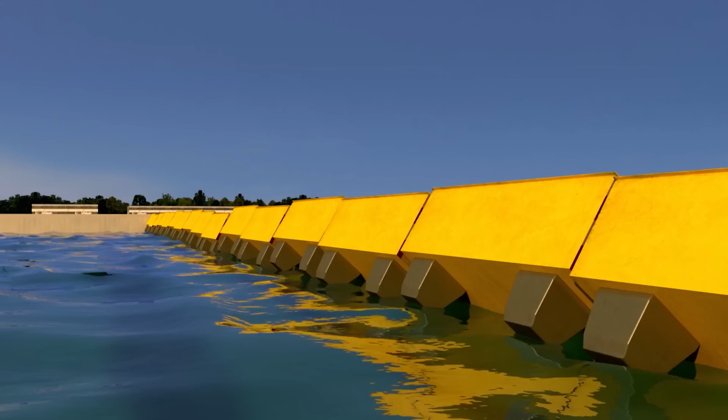For the last 30 years, engineers have planned one of the most ambitious moving dike projects in the world, dogged by indecision and scandal. Today, the Mose, the mobile seawalls the city never needed in the past, are almost ready to be used.

A new day rises over the Venice lagoon.

The water in the lagoon is between just 4 and 14 meters deep. But when the 550 square kilometers of sea surface are whipped up by adverse winds and tides, the sea level can rise by up to 2 meters, flooding the city that was built on millions of wooden stakes that hold the hundreds of sandbanks and islands together.

The architectural treasure that is Venice is threatened by the very element that made it prosper in the past: water. Its position and wealth have been its ultimate downfall. With a dwindling population, the city is literally being broken down by tourism and climate change. But saving Venice has become a World Heritage priority, and billions are being spent to stop the rot.

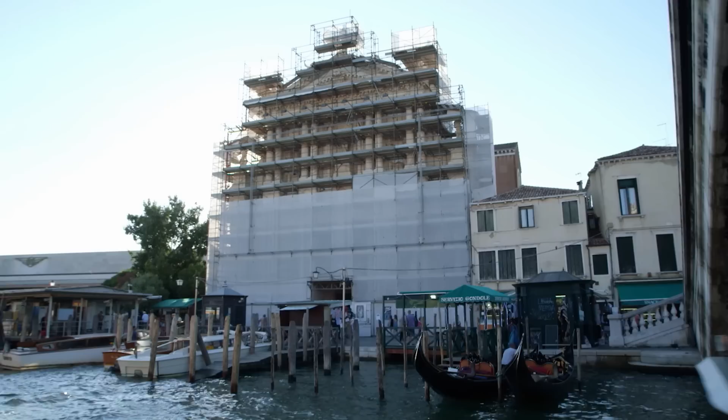The lagoon is an ecosystem in danger. Not only the city, but the hundreds of islands and wetlands that make up this unique landscape risk being lost forever, with the added complication of rising sea levels.

Bounded in the north by the river Sile and in the south by the Brenta, for centuries the Venetians fought a battle to stop the lagoon silting up, even deviating the course of inland rivers. Access to the sea was Venice's source of power, and the lagoon was its natural defense. In the last 30 years, the situation has been reversed. Trade now goes to Marghera, the city that drained the water table, and the sea has become a threat.

The walls of Venice are the massive floating barriers that will stop the sea from flooding Venice.

Giovanni Zarotti is the lead engineer on the Mose project. He has seen it grow over the years and now heads up the team that will bring it to fruition.

The new Venice consortium of Venetian enterprises has come together to build the Mose, or Modulo Sperimentale Elettromeccanico, the floating walls that will defend Venice from high waters.

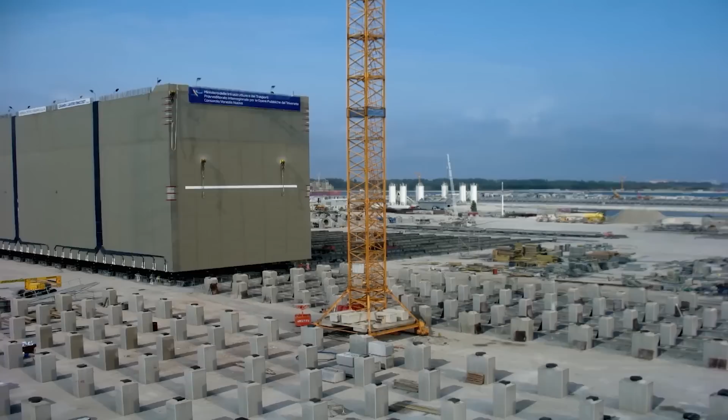Moving the massive engineering parts that make up the Mose fell to one of the world's leading heavy lift companies, Fagioli. In 2012, the company was engaged by the new Venice consortium to lay the floating barriers and concrete housings that cross the Lido entrance to the lagoon. It was the beginning of the final phase of the Mose project.

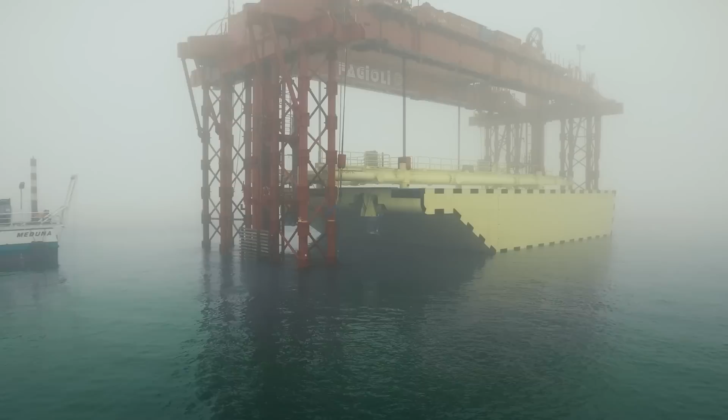However, the Malamocco and Chioggia entrances required extra engineering, as they are even deeper and wider than the Lido entrance. Fagioli's engineer, Tommaso Favaretto, was the lead engineer on the project.

As compared to the previous operation, we added horizontal elements, crosshead beams. We lengthened them to allow us to cover the geometric parameters of the walls of Chioggia and Malamocco. They weigh more and are larger than the Lido Tre Porti walls. Here we're talking about 400 to 450 tons of weight to move over a length of several tens of meters.

The Mose is one of the largest works of civil engineering built in Italy. Over the last 10 years, it has provided hope that the city can be saved from sinking under the waves.

The world waits with bated breath to see if the walls of Venice will actually save the city. The project is one of the most complex works of civil engineering ever built in Italy, designed to save the city from periodic flooding.

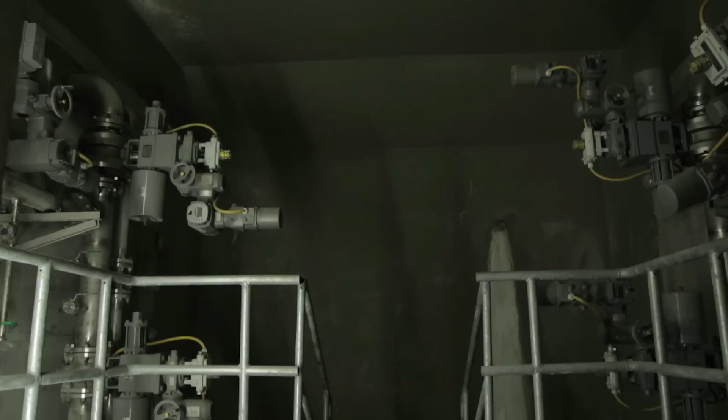The project was officially launched in 2003, and a lot of the work, most of which has already been finished, were works of civil engineering. So, for example, the concrete housings that form the base of the work, and the housing for the walls, consolidation work, and the essential infrastructures that the whole project needs, located at the lagoon entrances.

The Venice Lagoon is 80% made up of wetlands that are partially submerged, and only 12% is made up of islands, while the city of Venice is actually held together by millions of wooden piles pushed into the mud and sand.

The tides that so threaten the city are also its only real drainage system. Twice a day, clean water enters the canals and dirty water is taken away.

As a result, there were several prerequisites for the Mose that the designers undertook to respect, not only to maintain the overall visual aspect of the lagoon, but also to ensure free exchange of water between it and the open sea.

So we began the planning process, but the Italian government set a certain number of prerequisites for the construction process, and there are two main ones: that the construction should have a low visual impact and should not greatly modify the overall aspect of the lagoon. The second was that it should not substantially change the hydrodynamic exchange between the open sea and the lagoon.

Later, the plan involved restoring the natural ecosystem that contributed in the past to slowing down the flooding process.

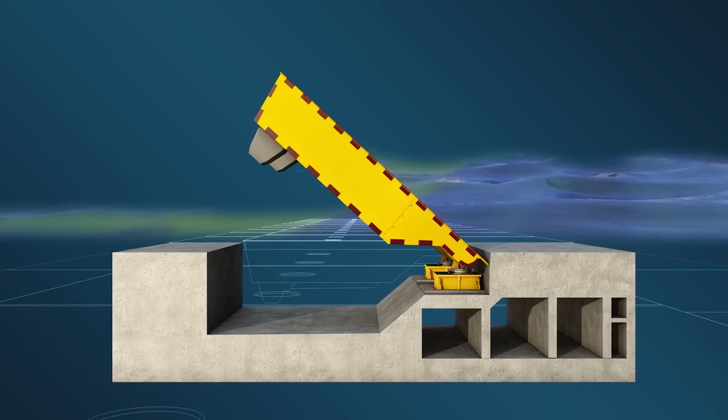The Mose concept is based on a system of floating barriers to close these 3 openings when adverse wind and sea conditions are forecast. They are massive steel walls that can be filled with compressed air when necessary, rising to the surface to make a floating wall.

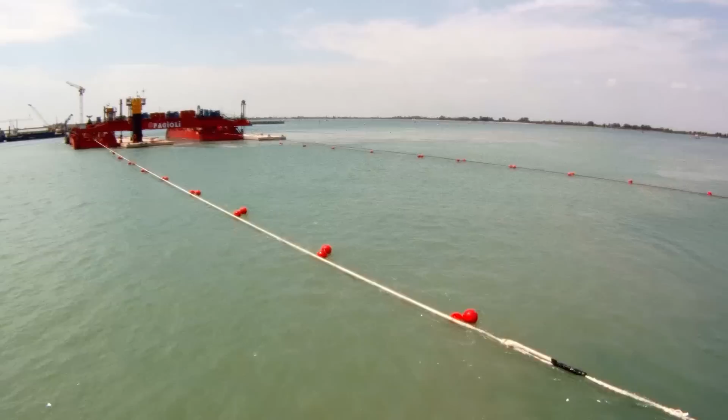Fagioli used a special catamaran to position each 12,000-ton concrete housing over the 12-metre deep trench dug into the sea floor, where 4 300-ton capacity strand jacks lowered it onto bags that were slowly emptied to provide the soft landing needed for absolute precision.

The exact location of each caisson was guaranteed using GPS positioning and radar. It was one of the most complex moves Fagioli had ever carried out.

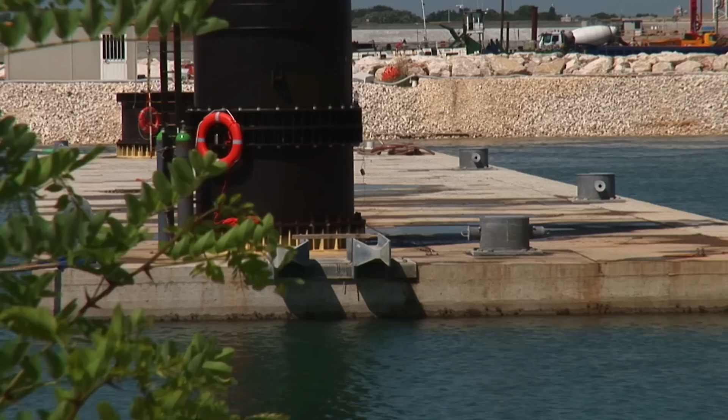The channel is particularly deep, and the caissons, or bunkers, were built close by as they were particularly heavy. While at Lido each caisson is able to house 2 barriers, here each concrete underwater bunker houses 3.

At Malamocco, the system used was different, although the housings were essentially the same. They were built on a bank above sea level and then moved via a system of rollers and taken to the synchrolift, a kind of massive elevator that lowered them into the sea. They were then floated away and tugged to their final destination, and sunk again.

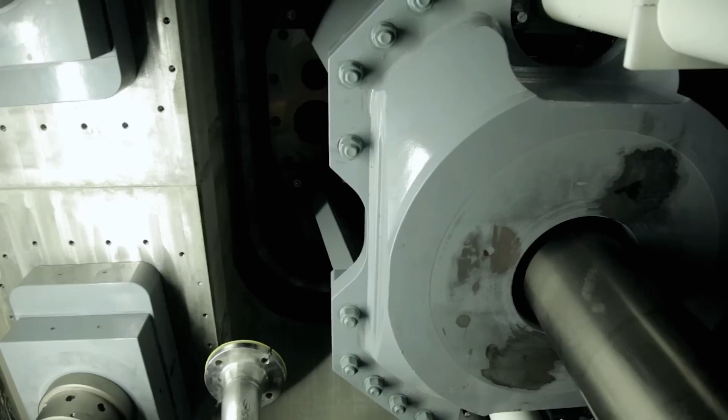Then they were lowered into the water to be tugged out to the open sea and dragged to the place where they were to be sunk. The sea floor had to be specially prepared to house them, so that their roofs were flush with the natural depth of the sea in those locations. Then they had to be emptied to allow access to workers to prepare the electrical wiring and compressed air pipes that activate the enormous floating walls.

The size of the housings varies from one lagoon entry to another, but the largest are 60 meters long, 40 meters wide, and 12 meters high, and the whole of the height has been encased level with the seafloor. Weights differ too, but we are in the area of 22,000 tons of concrete.

The barriers have a very important element, that is, the hinge that allows them to rotate and also receive all the surface piping that carries air, that make them rotate and float. So there are corridors that allow workers to run through the housings.

The depth of the lagoon entrances at Chioggia and Malamocco required significant modifications to the original gantry crane that was used in 2013.

The Malamocco entrance has an extra difficulty that was dealt with during the planning phase and in the construction phase: we had to guarantee the continued passage of cargo ships going to Porto Marghera, the industrial area of Venice.

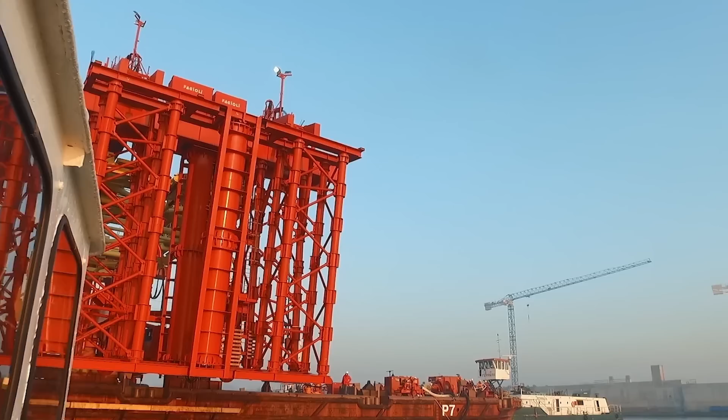The Fagioli engineers, however, had other concerns. Their new gantry crane had to be tall enough to reach the deeper caissons of the Malamocco and Chioggia openings, some 14 meters deep, and at the same time be small enough to be safe and stable on the barge.

The openings of Chioggia and Malamocco are deeper. Malamocco, which is the deepest, is 14 meters deep, between the surface and the top of the housings.

It was necessary to raise the crane's height. So we needed to make the crane taller, adding several meters of leg length. Compared with the previous 9 meters, we had to add 6 more meters of trellis tower.

An engineering complication made their lives even more difficult.

This gantry crane was built especially to lay the 37 walls that make up the barriers at Malamocco and Chioggia. The massive trellis structure had to be able to lift the larger floating barriers that weighed more than 400 tons and were wider than the Lido barriers. The calculation of the forces applied to the different parts of the crane had to be precise, especially because the crane had one potentially weak point.

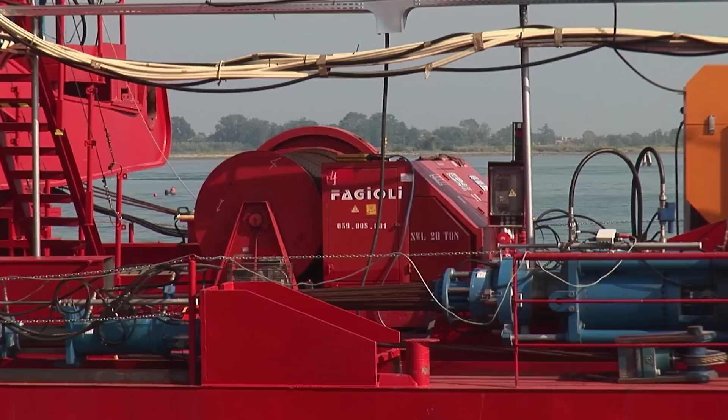The special tool that the Fagioli engineers have at their disposal is the strand jack, the hydraulic jack that is able to slowly lift hundreds of tons of weight, using a concept that is simple in itself but highly complex to build.

A strand jack is a hollow hydraulic cylinder with a set of steel cables, the strands, passing through the open center, each one passing through 2 clamps, one mounted to either end of the cylinder. The jack operates in the manner of a caterpillar's walk, climbing or descending along the strands by releasing the clamp at one end, expanding the cylinder, clamping there, releasing the trailing end, contracting and clamping the trailing end before starting over again. The real significance of this device lies in the facility for precision control.

When many strand jacks are activated at the same time under the control of a central computer system, the lifting power of each individual steel strand can be multiplied infinitely. Fagioli famously supplied the near 100 strand jacks that rolled the Costa Concordia onto the artificial sea floor so that it could be readied for refloat.

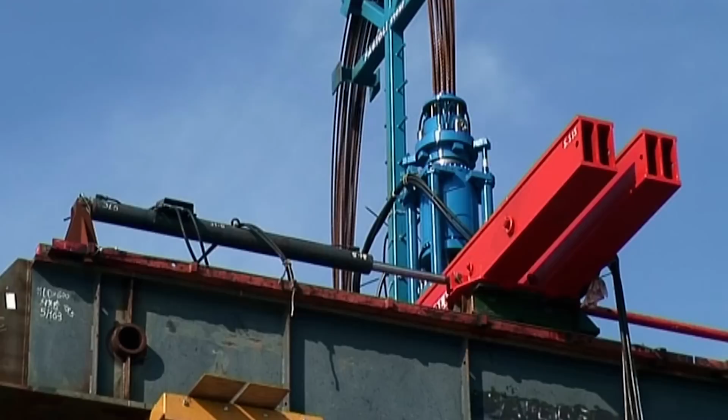Fagioli designs its own strand jacks, and on this entirely new gantry crane, the sets of strand jacks did different jobs. The folding legs needed 4 strand jacks each to open and close the joints.

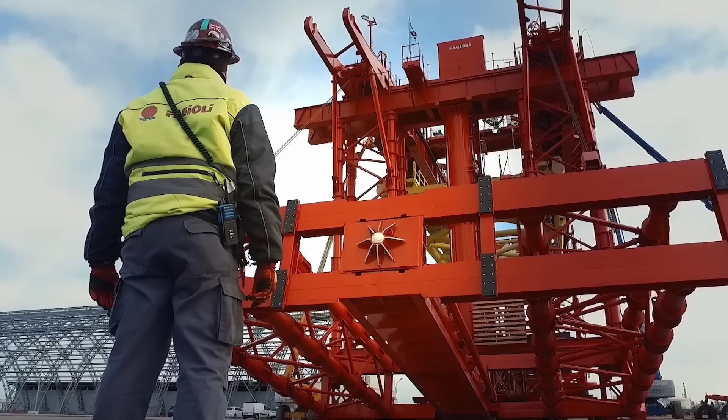The gantry crane is assembled and built at a site near the place of operation, but not on it. The place was ex Area Pagnan.

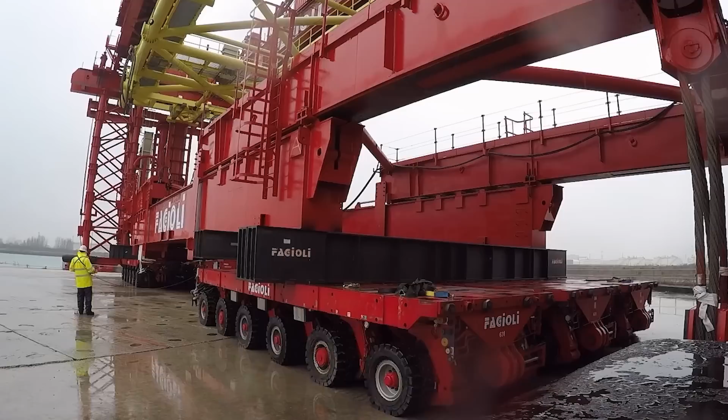Fagioli uses SPMTs in all their heavy lift operations. SPMTs are modular, wheeled flatbed vehicles that are remotely driven and maneuvered. They are able to move in any direction and even rotate, as each set of wheels is independent. They can be as long or as short as the user wants, as well as hydraulically raising their load.

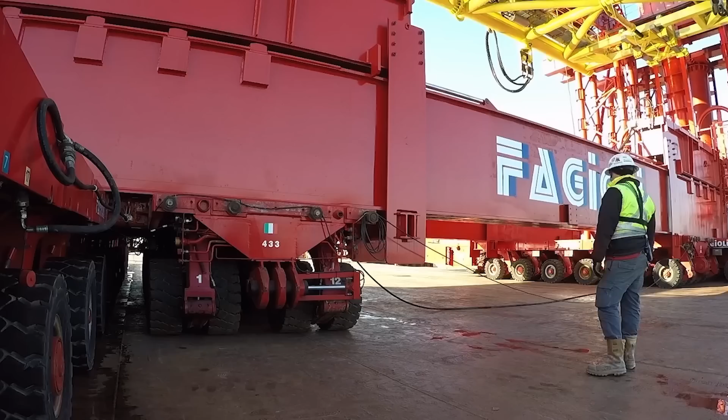Once the gantry crane was built and put together like so many Lego bricks, it was transported using another system built by Fagioli, called the transport beam. It was loaded onto the barge using self-propelled transports, and then taken to the worksite, where it was prepared for the installations.

Now came the delicate moment of actually taking the crane to the location of the massive concrete caisson.

Once the worksite was reached, the crane was disembarked and turned 90 degrees into the installation position. Then it was re-embarked in the installation position and taken to the point above the concrete housing where the first barrier was to be lowered and then set up.

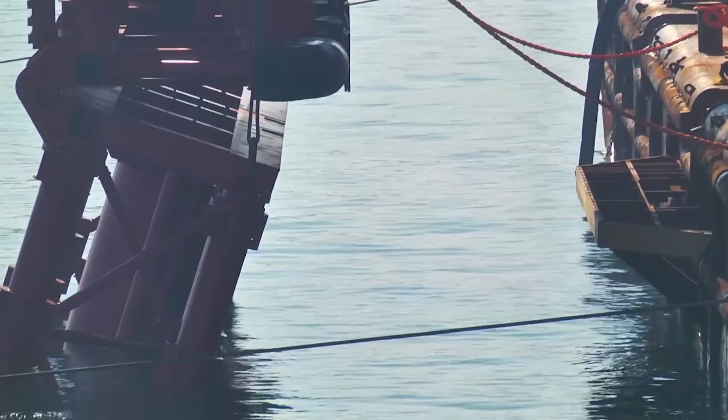The strand jacks pulled open the legs, which were then locked to provide maximum stability. The lifting device lowered the gantry crane onto the surface of the caisson.

The gantry crane was equipped with a centering cone located in the base of the frame, a male part that wedged into the receptacle on the surface of the concrete housing. Once in position, the gantry crane was lowered until the male cone on the foot of the crane entered the receiving cone located on the housing surface, entering the housing of the sill caisson.

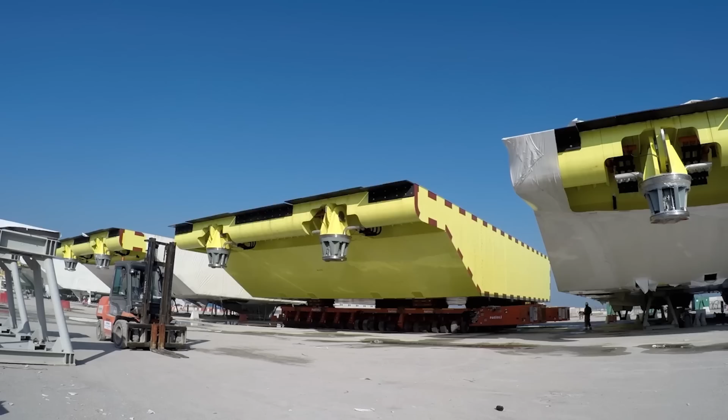The barge was withdrawn and went to collect the huge yellow floating barrier that had to be placed on the underwater hinge.

The fishing beam was lowered by four 300-ton capacity stranjacks, and once the barrier was safely attached using electrically operated couplings, it was raised. Once again the barge could slip away, leaving only air and water between the barrier and its place of final location.

The barrier is attached to the fishing beam, which is attached to the gantry crane via stranjacks that allow vertical movement.

The fishing beam is equipped with hydraulic systems that push against the gantry crane to allow for horizontal movement, so precise positioning is achieved both vertically and horizontally, almost to the millimeter.

Slowly but surely, the fishing beam lowered the floating barrier 14 meters underwater until the male part of the hinge fitted snugly into the female receptacle, where it could be fixed. The fishing beam could then be withdrawn once again.

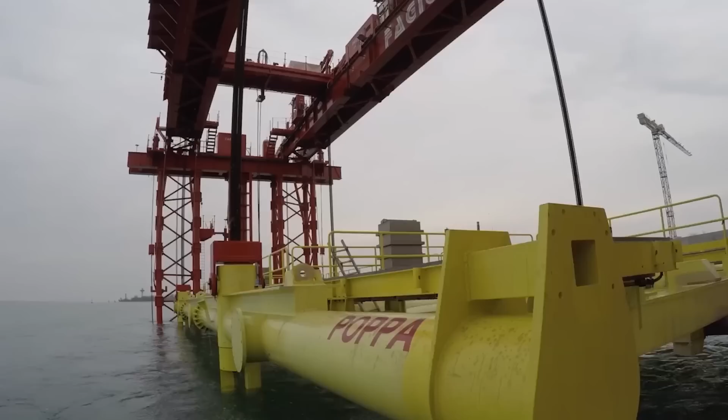However, the whole operation involved laying floating barriers in as little time as possible. So as soon as the first was fixed in place, the transportation beam was brought out on the barge, and once again the gantry crane was lifted out of the water. The stranjacks pulled up the legs, and once again the barge was tugged to the next position.

Laying the Mose floating barriers took months, in every kind of weather that the Venice lagoon could throw at the equipment and the men.

In all, there are 78 barriers, but more were actually built because there are 2 spare barriers for every lagoon entry. This is because these barriers will have a periodic need for maintenance, so in order not to leave the place where a barrier has been removed empty while it is being repaired, the extra identical barrier is positioned there as soon as the barrier due for maintenance is removed.

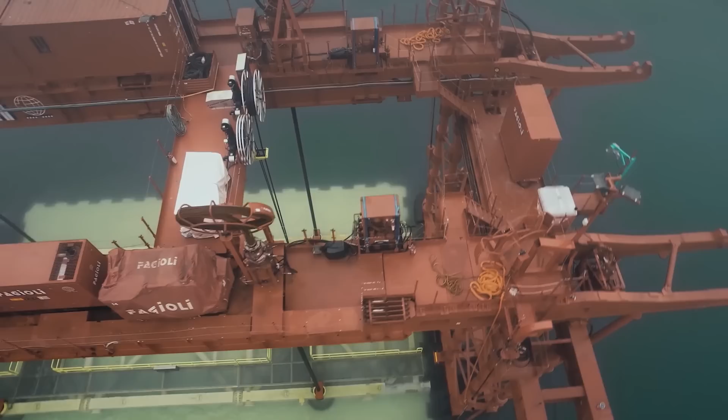As the seasons came and went, the floating barriers of Chioggia and Malamocco were securely laid, and the great civil engineering project approached completion. The next steps involved testing it.

The Mose floating barriers are already operating in experimental mode at Tre Porti, to check they work and in order to set activation parameters.

Here, all 20 barriers have been laid, and they have been raised several times, and so the entrance closed several times.

Although billions of euros have been spent on the MOSE project, it will only be activated under certain specific conditions—conditions that threaten the whole of the city, rather than just the area of Rialto and St. Mark's Square, the lowest points, which will continue to be flooded even during relatively low high tides.

The buildings of Venice are light, with as much as half of their outer walls open with windows. Rotting brickwork and wood severely undermine the structural integrity of the palaces and churches of this once thriving city.

Around 2020, we expect the whole project to be finished, with the support plant fully operational, and with MOSE available to protect Venice from high tides. By the end of 2021, we will have finished the ancillary work, more to do with the environment and architecture, that does not influence the operation of the whole project.

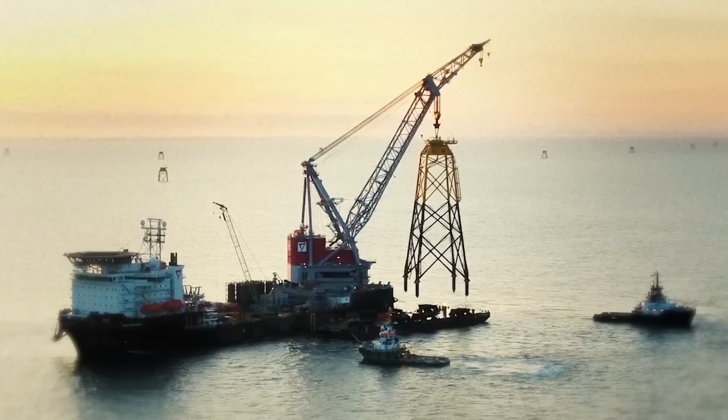The sun rises over the Dutch port of Schiedam, located on the busiest waterway of the country, west of Rotterdam and close to the open North Sea. This is where a hub of nautical companies provides the most advanced engineering support for the whole of the maritime industry. Gusto MSC is one of the oldest offshore design and engineering companies of the country, and it is where the world's largest and most advanced nautical cranes are built and integrated into ships that are also designed here. The glass and steel interior of the headquarters has been grafted onto a building that was once home to the company's competitor when it was founded a century and a half ago.

We see the ship and the jackup, but together with what we call the mission equipment, like cranes, we see that as an integrated design, which basically means the purpose of this type of ship is not so much sailing. The purpose of the ship is to perform a heavy lift. That's where it starts with. Is it for a ship, or is it for a jackup or a semi? That already has a big impact on the type of crane and on the design.

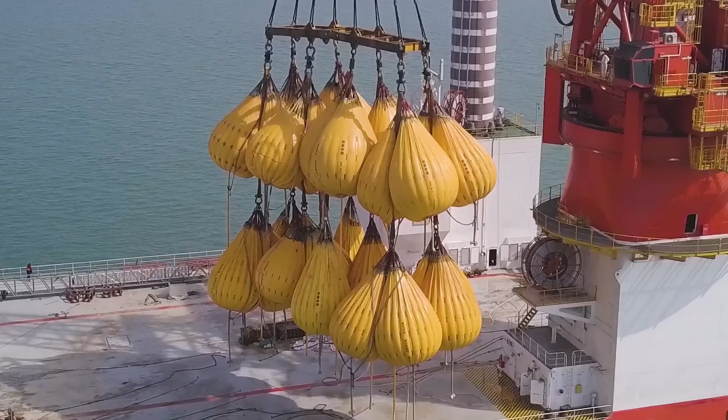The name of Gusto MSC is intimately tied to the world of shipborne cranes, machines that have played a fundamental role in the offshore energy industry for decades. Little-known machines that have been strategic for the growth of first oil and then the wind farm businesses. Gusto MSC's clients are companies that, amongst other things, require heavy lift capacity offshore. The cranes that the company has designed are integrated into ships, jackups, and rigs that not only navigate the seas but also have the necessary stability to withstand the environmental forces and perform their heavy lifting tasks.

Arjo van Putten is the chief engineer of the crane department at Gusto MSC. He has honed his skills designing massive cranes of all types, including the huge 5,000-ton crane of the Oleg Strashnov installation ship. Lifting capacity is one of the most important things, and the outreach, in fact the combination. For example, if it is 5,000 tons at 30 meters or 40 meters, that's really a big difference. Once we know that, then it is important also to know the lifting height, especially nowadays for the wind turbine installation cranes. The required lifting height increases quite a lot, so that's also an important factor, and it can have an impact on the complete design of what we are going to use.

Alain Wassink is the marine architect who designed the Oleg Strashnov and is now sales director for the Gusto MSC cranes. Gusto MSC is a design and engineering firm, and we specialize in design of mobile offshore units of all sorts and types, from jackups to semis to ships. The company started out as a shipyard already in 1862 and has made a lot of different things over time, but it has pretty quickly specialized in heavy-duty workships. Floating cranes already started in the 1900s, and dredgers and other ships. Especially from the 60s to the 70s, it started to specialize in the offshore industry.

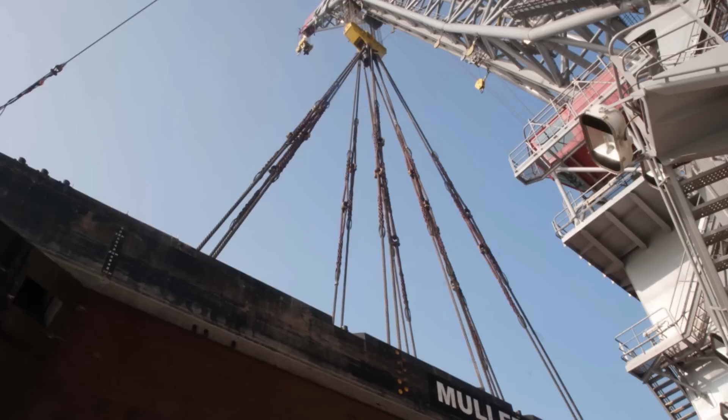The massive crane that Alain and Arjo have built is the result of 7 years of hard work, first designing and then building and testing the ship and crane. It was in the spring of 2007 that we got the order for the delivery of the crane.

Then we spent about a year on the whole design, and already we start purchasing materials because there are some long lead items, especially at that time when the market was booming, so delivery times increased quite fast. So we ordered all the long lead items as soon as possible. Then the eventual delivery was almost 4 years after we had the original order.

We started out already in 2005 with the owner, Seaway Heavy Lifting, to come up with a concept for a fast crane vessel. Most vessels were quite slow, 4 to 6 knots at that time. This would be a fast crane vessel, versatile, with the then highest lifting capacity for a monohull in the world. They wanted a design that could sail fast and be very stable when doing lifting operations, which usually is a contradiction.

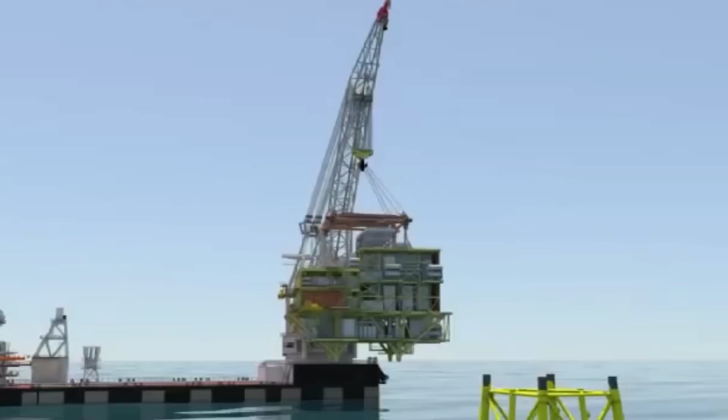The naval architects of Gusto MSC accepted the challenge to design a ship that was highly unconventional, but also highly competitive in terms of speed and, of course, fuel consumption. The design criteria for the Oleg Strashnov included the ability to work on site, while the ship also provided a stable base for the massive crane with its unique revolving main hook with a 5,000-ton lifting capacity. Designing such a ship, maintaining balance when the crane arm is fully extended, was a challenge.

We developed a very special hull shape with them, which is a patented hull that has a dual draft, where you can have a small draft, with a narrow hull, so less resistance, which is quicker with less fuel consumption, but less stable. And when you do a heavy lift, you need a lot of stability but no speed. So you can go to a deeper draft, and then the ship is much wider and has more stability.

The main characteristic is that it can lift 5,000 tons. It does it at an outreach of 32 meters. The maximum overturning moment is at another distance, that's 3,800 tons at 43 meters. The lifting height is approximately 100 meters above the main deck for the main hoist. And there's also an auxiliary hoist, which can lift about 30 meters higher, with an 800 tons capacity.

Oleg Strashnov, however, not only had to have one of the biggest cranes on the high seas, but also the widest range of lifting capacity. So Arjo introduced a unique design into the crane, a crane within a crane.

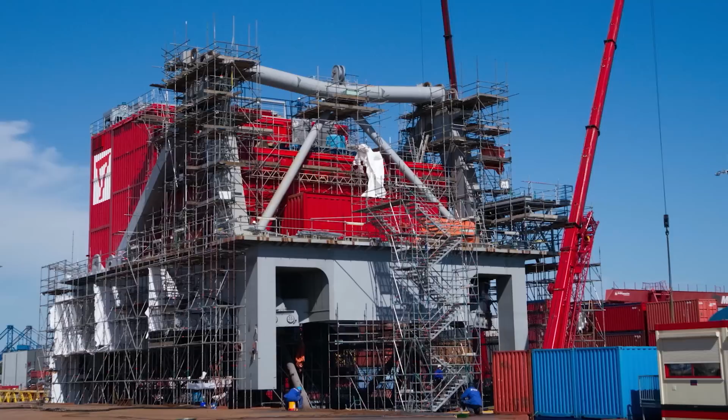Once the design phase was over, the ship and crane could be constructed. The day came when this monster had to be built, and Arjo and Alain worked together to deliver one of the most amazing and least celebrated ships plowing the ocean waves. In particular, the lifting part of the unit required some of the most innovative construction techniques. Everything is massive.

The boom chords, for example, the big tubes, are made from 690 material, that's steel with a strength of 690 megapascal. Other parts like in the A-frame, the backside, mostly parts in tension, are also made out of the 690 yield material. But the braces, which are welded, the tubes in between the big chords, are made of 355 yield material, because they are not governed by the stress in the material, but by vortex shedding.

However, most of the crane's work is done with small loads, and this is where the supplementary lifting machines come into play.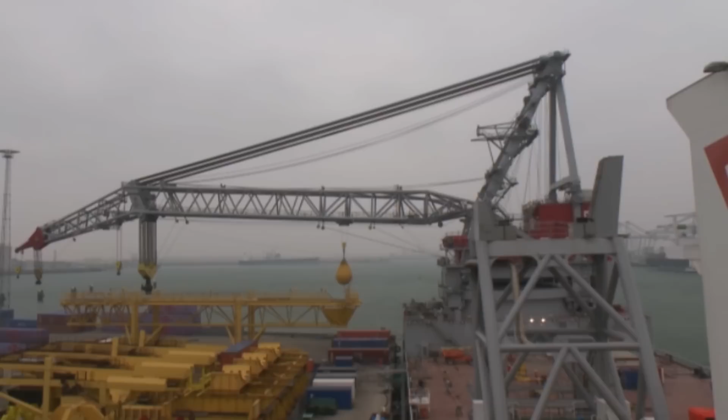A special thing about this crane is that, normally when the crane is rotating with an empty hook, with a boom at about 60 degrees angle, the center of gravity is exactly in the middle. That was one of the design criteria. There is a removable ballast system at the backside of the crane, and by doing this, most operations are actually small loads. So the lifting capacity is 5,000 tons, but I think more than 90% of the lifts are less than 100 tons. During all those operations, the boom is at approximately 60 degrees, and it can rotate without having to ballast, because the center of gravity is in the slewing center.

The industry sets standards, but these cranes are so huge that extra safety measures have to be introduced to make sure nothing, absolutely nothing, goes wrong.

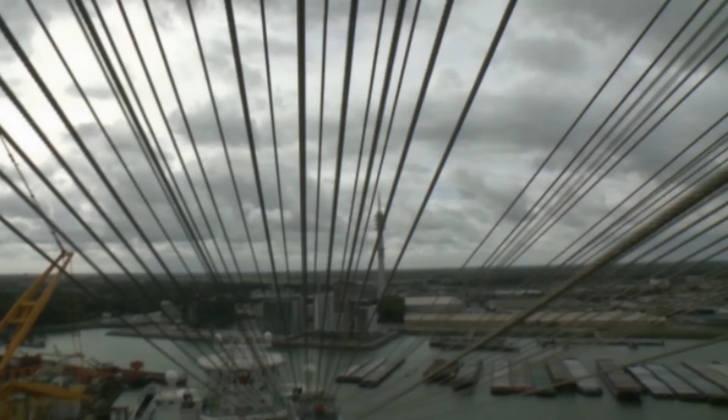There are several main component parts of a crane: the boom, the long arm that extends out to sea to lift heavy loads, and the A-frame that controls the extension of the boom, lifting and lowering it as necessary, and through which the lifting cables pass. There is also the ring platform around which the crane swivels, and the motor that provides the power both for moving the crane and turning the winches that pull the loads up or down.

On Oleg Strashnov, all these components are massive. The A-frame is also special, as the client required the ship to pass under the world's bridges, such as the Bosphorus Bridge that joins Europe with Asia, so as to engage in offshore heavy lift in the Black Sea, one of the world's most strategic areas for energy resources.

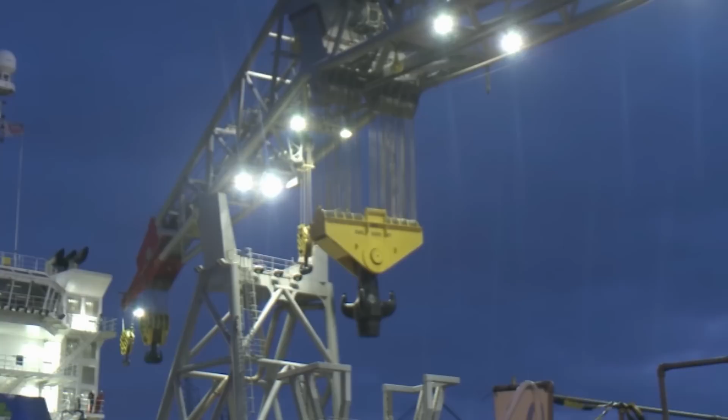We added an extra hinge at the aft side of the A-frame, at the back leg, which is a vertical leg. Normally that leg is in tension, but during transit of the vessel there can be a vertical load downwards as well, and then it's in compression.

What we did is we created an extra hinge, which is normally locked by a small beam. When we want to lower it, first the boom is lowered into the boom rest, and if we keep on rotating with the boom hoist winch, the rope tension is lowered, and eventually the A-frame should go backwards, but you have to help it a bit. So there is a locking system, and when you unlock it, there is a hydraulic cylinder that gives us what we say a kick in the knee, so it starts to bend, and then on its own weight, it has to go backward.

Once these major design features were established and construction completed, the actual assembly of the massive crane began. This in itself was a mega-lift operation.

The motor housing was built in China and delivered to the Schiedam docks, where it was to be integrated with the ship. Here it was lifted onto a massive barge and lifted by two shear legs to be transported to Oleg Strashnov.

The motor housing had to be positioned with millimetric precision, and only the expert eyes of the designers and construction workers could guide it properly into place. It was placed delicately on the base and the pin.

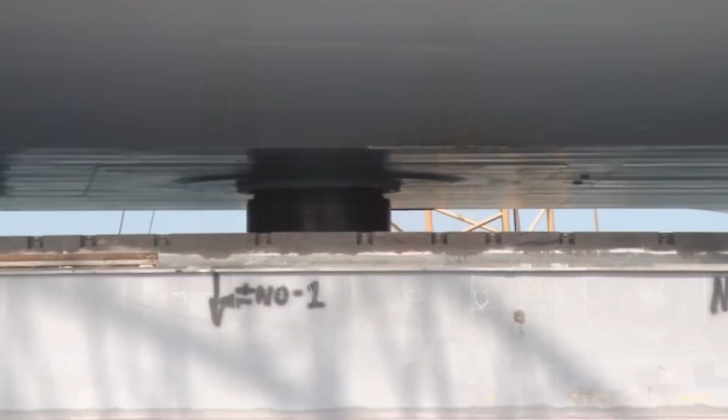The bogies followed and were fitted perfectly on the rails, allowing smooth rotation of the crane.

Then the A-frame had to be fitted. Not only the static part had to be precisely connected with the crane base, but the folding segment had to be lowered so that the massive pins that allowed it to be collapsed to reduce height could be inserted accurately. This in itself was a mammoth task, and yet there was much work still to be done.

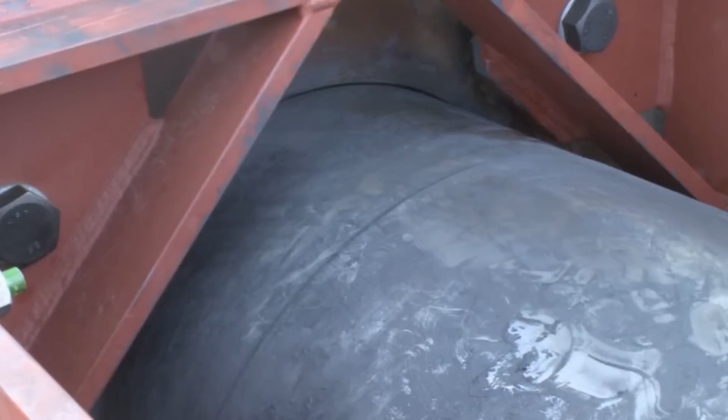The largest single element of the crane was now ready to be moved. The heavy lift company, Sarens of Rotterdam, moved the boom onto a barge using self-propelled modular transporters, or SPMTs, from which a massive shear leg was able to lift the 100-meter-long steel trellis structure onto the huge hinges that awaited it on the crane body. This was the crucial moment of the assembly of the whole Oleg Strashnov crane ship.

This was followed by lifting the ballast for the crane, the counterweights that are brought into play every time the boom lifts a weight at the fullest extension.

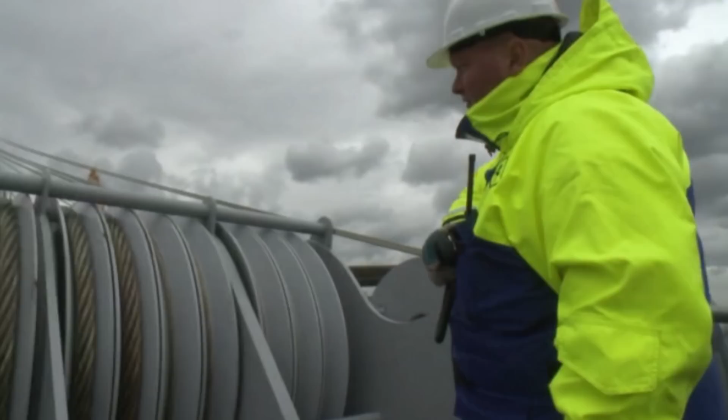The next stage involved the reeling of the cables and ropes. Dozens of steel cables were pulled through the boom guides and then meticulously wrapped around the winches. The closer to the core of the winch, the less cable is released, so the automatic gears are key to keeping lifting speed uniform. The 64-millimeter cables had to be guided by special ropes through the boom all the way to their winches, one by one, and wound on accurately, securely. This is the heart of the whole crane, where the lifting actually takes place.

From the client we receive certain lifting speeds. They specify a lifting speed and average speed, because if you have the winch, there are several layers of steel wire rope on the winch. The rope speed is different when you are at, let's say, the 10th layer or the first layer. So they specify an average speed, and that's what we work with. We calculate the required power.

Now that the crane had been constructed and installed on Oleg Strashnov, the next crucial stage could begin. Oleg Strashnov is the largest monohull crane ship in the world and flaunts three very special characteristics that other ships of the same type do not enjoy. It's fast, its crane can lift 5,000 tons, and it is incredibly versatile.

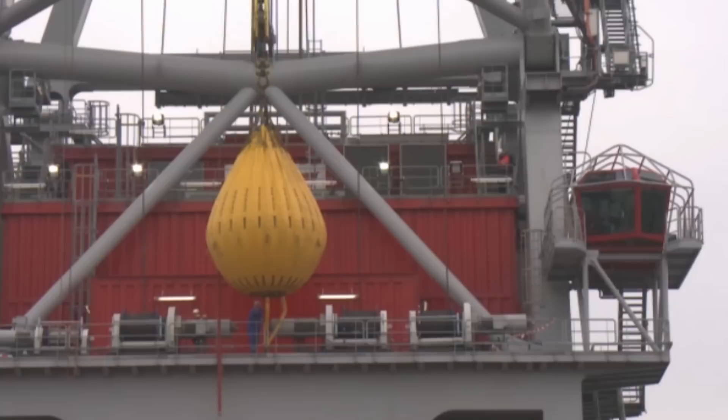The next test phase involved putting the secondary hook through its paces. Now came the moment for testing and calibrating the 5,000-ton crane. To do this, the crew filled a whole barge with water, and the main hook was lowered to lift it. Not only did it have to lift the weight of the barge and water, but, just for good measure, an extra 500 tons. The crane successfully lifted it and swiveled with it to put the structure to the test at all angles. The crane passed the test with flying colors.

The ship was now ready for sea testing.

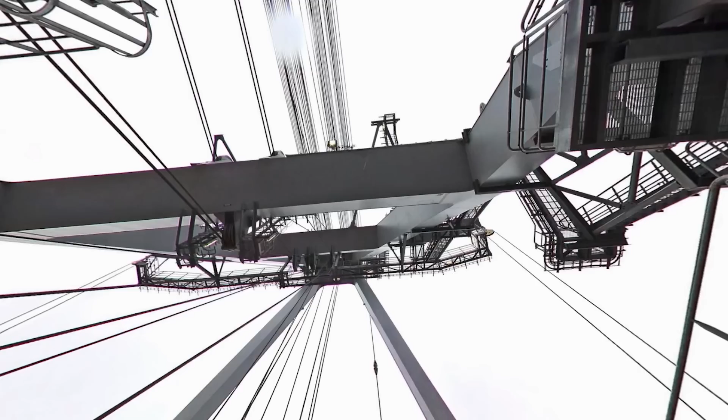So let's take a tour of the Oleg Strashnov as it is today. These photographs allow us to see the inner workings of the offshore workhorse. This is the view from the crane driver's seat. The whole length of the ship is now visible, with the hundreds of pieces of auxiliary equipment on it.

From the crane side, you have lifting tools, all kinds of tools that you use to actually pick up the load, rotate the load, control the load. For instance, for a wind turbine, once you put the monopile on the seabed, you need to keep it in place, otherwise it falls over, so there's a gripper that keeps it in place. Then you need a big hammer that is actually lifted on, and that's also a couple hundred tons, the hammer alone. That is all the equipment for the lifting operation itself.

Then for the positioning, you need the ROVs, so the remote-controlled robots underwater. Surface diving is still used. It's amazing how much equipment fills up the deck when you do such an operation.

The main hook was specially forged as a single block just for this crane.

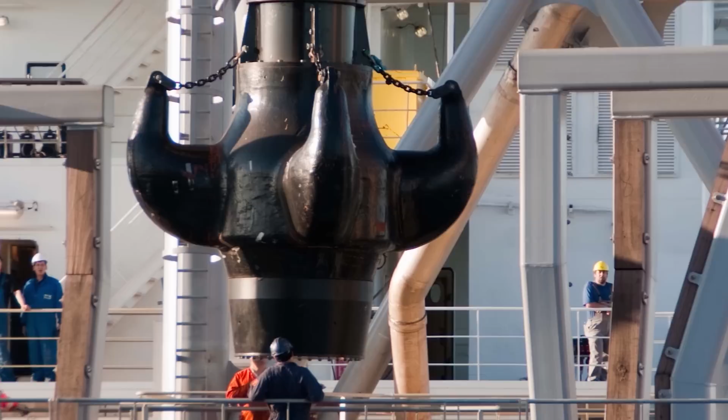The crane is electric powered, so it receives power from the vessel. The vessel has generators, and we receive 6.6 kilovolts from the vessel. It's about 6,500 kilowatts, the power that we maximum consume. In the crane, at the backside, there are 3 levels of electrical equipment, and there it is transformed to 690 volts. We have rectifiers that make DC from the AC, and then we have drives who convert that power to the motors at a certain frequency and speed.

Special safety features ensure that accidents with the winches are practically impossible, including clamps on the cables and sensors that stop the hooks from impacting the top of the crane. The crane is also designed to be able to operate in harsher weather conditions than its competitors.

Then the hook is hoisted towards the boom. We always know the exact height of the hook, and when it's coming close to the boom, there is a warning. When it comes a bit higher, it automatically stops and there is an alarm. And when there is the warning, it already goes to a lower speed. When there is a situation where the crane operator wants to go even higher than that, he can overrule that, and there is another safety switch at the boom which stops that motion, and that cannot be overruled anymore.

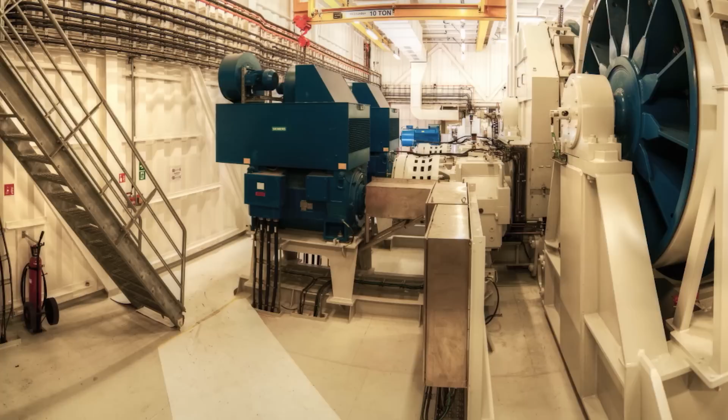The boom and hook are not the only areas of the ship that can go wrong. There is a double braking system on the cables and winches too, that can hold loads in place if there is a danger, or even lower them slowly if power is lost.

These winches have a double brake system. You have a system on the drum itself, that's for a holding brake and for emergency. And there is also a brake at the gearbox. So there is the motor that transfers the load to a gearbox, and that's the high speed. Then one of the intermediate shafts is used to mount the brake.

There was a bit of a special request in this case, because we also needed to do emergency lowering on those brakes. So in case there is no power available, we need to be able to lower the load with the brakes.

Oleg Strashnov has a class 3 dynamic positioning system, which means it can stay in location with movable thrusters, but it can stay in location even after a fire in one of the engine rooms. So it's got redundant engine rooms, redundant thruster rooms. A total installed power of 27 megawatts is needed, divided over 6 generators, with a 6.6 kilovolt high voltage distribution system, which is top end for this type of vessel.

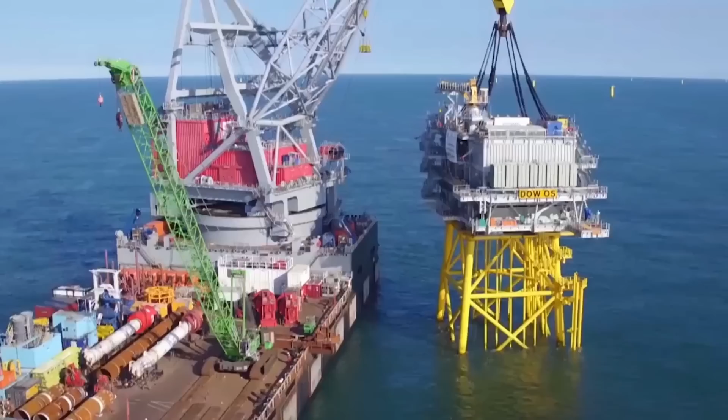The same is true for crane movement, as every change in the ship's center of gravity has to be compensated for. When we do have a big load, indeed the vessel needs to ballast. So there is a ballasting system, and it pumps a lot of water from one side to the other side.

For example, when we do a test load with 5,500 tons, to make one revolution, we do it very, very slowly, because the crane can do it in 3 minutes, but the vessel needs to pump a lot of water to the other side all the time. So one revolution takes then about 1 hour instead of 3 minutes.

The ballast system on the crane vessel is one of the key systems you have on board, because you have to keep the ship upright and compensate for the crane. So the crane is revolving and the ballast system has to compensate for all the loads that act on the hull, and it's a ship, so it moves.

In this case, with this kind of crane, with a large outreach, you need a lot of ballast capacity. So the ship has around 50,000 cubic meters of ballast capacity, and it has a pumping capacity of 20,000 cubic meters per hour.

The true power of the crane lies in the motors that power the winches. They are 6,000 kilowatt engines, and have redundant backup systems just in case they fail and a heavy load has to be brought down gently.

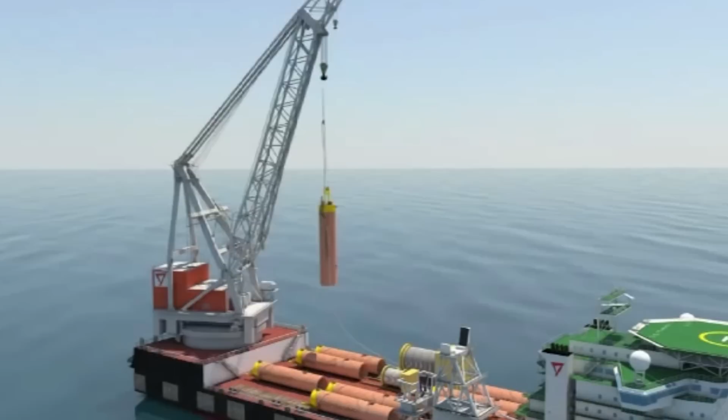At last, Oleg Strashnov was ready for operations. Its extreme versatility allows the ship to perform all the operations involved in building an oil rig or a wind farm. This animation shows the phases of laying the foundations of a wind farm control center: first lifting the foundations and positioning them on the sea floor, and then moving the structure itself, using the 2 hooks on the crane to right the steel structure and position it onto the foundations.

The really heavy lift comes with the upper platform, a monoblock of drilling and living areas, all less than 5,000 tons. The ship's versatility allows for it to carry out many operations, and this in turn reduces time on site, generating significant savings for oil companies and wind farm builders.

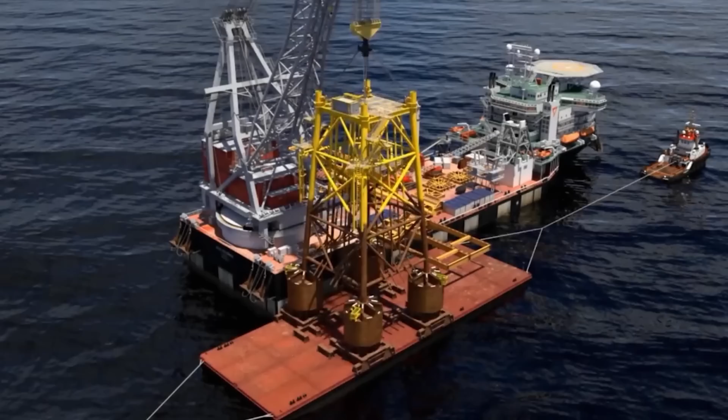The whole new source of energy is developing all around the world, and this ship has the ability to supply the wind turbine market optimally.

Offshore wind farms maximize efficiency and can be bigger than those built on land. The size of the individual wind turbines that must be installed on the seabed is also growing.

It was designed to do operations for the oil and gas business. But the first job it had after it was finished was the installation of monopiles for quite a big wind farm, and they were very successful at that, at Seaway Heavy Lifting. Afterwards, the majority of all the work they have done with the vessel is for installation of foundations for wind turbines. They also did some interesting oil and gas jobs, but the market changed quite a lot in that period.

In these images, we see the phases of wind turbine construction and how the massive 5,000-ton crane is suited to the task. The ship is able to lay both the foundation and the mast, and then the turbine itself, all in sequence.

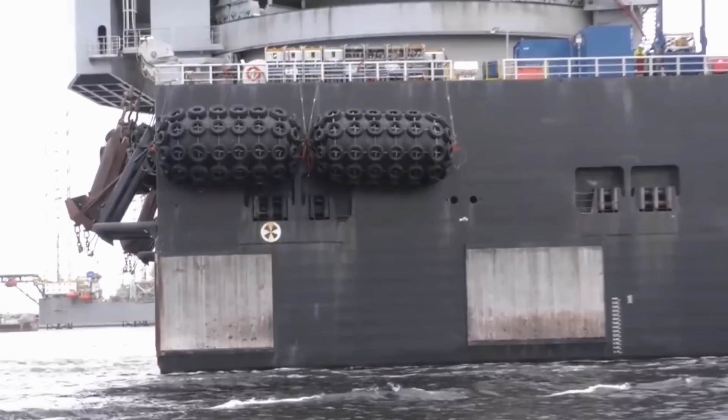The Oleg Strashnov sails off onto another assignment as the offices of Gusto MSC and the port of Schiedam are closed for the night. There is no shortage of work for these new versatile crane ships. The future for seaborne heavy lift has never looked brighter.

Another day at the port of Schiedam, Netherlands, the heartland of the nautical industry, a hub for nautical services worldwide. This is where Gusto MSC enables and supports safe and efficient operations at sea.

The Oleg Strashnov crane ship has inspired other vessels, including the Hai Yang Shi You 201, which was built in China based on Gusto MSC design, and also mounts a 4,000 metric ton capacity crane and a pipe laying system able to lay rigid pipelines in 2,000 meters of water.

In the energy business, mono-hull ships are not the only solution, however. So the company has designed several jack-up rigs that are more stable than ships when working at sea.

There's a clear difference in foundation installation and turbine installation, where especially the foundations are getting bigger and heavier, but they can be installed by ships, which are usually easier built with larger cranes, while a jack-up is more stable, less movement especially, and is very well suited for turbine installation because of the fragile parts.

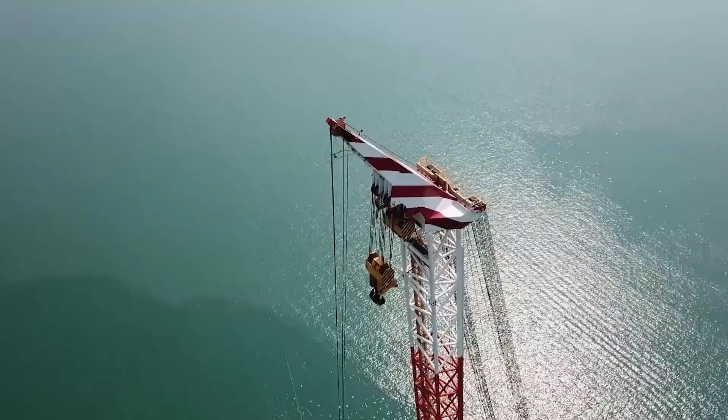One of the jewels in the crown of Gusto MSC is this mini crane built to be mounted on the leg of the rig to provide especially fine lift.

Named after a crab's claw for its crab-like grabbing motion, the Chela can reach below the cantilever and elevate toward the main deck, providing crane access to areas that were traditionally blocked by the drilling cantilever. By being able to work in this area, Chela has significantly reduced total well construction time.

And in the energy sector, time is money. This crane, with its multifunctional claw arm, is also special because it can easily be taken apart and remounted and retrofitted for different jobs.

But it also is making repair work on platforms out at sea safer for workers by literally lending a hand in narrow, small spaces. By separating wireline operations from the drill floor operations, Chela effectively reduces human interaction between the different crews doing different jobs.

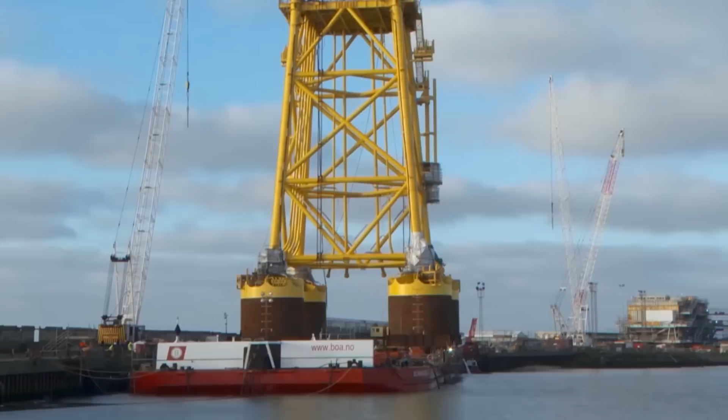The wind blows constantly across the dunes of the Netherlands' northwest coastline. Just offshore, wind turbines are being laid to create some of the largest offshore wind farms in the world. The Dutch are world leaders in this sector, and Oleg Strashnov is poised to capitalize on this rapidly expanding new market. As demand for energy continues to surge, oil exploration will continue in the petroleum-rich North Sea, and dependence on renewable wind energy is also likely to expand, creating many new opportunities for these kinds of versatile marine cranes.

The sun sets on the port of Schiedam, the heart of heavy lift in the Netherlands. This is where ships have been built for centuries. This is where cargo has been handled by traders in the great Dutch tradition for centuries. Nowhere is more suited to the development and construction of some of the world's most clever cranes.

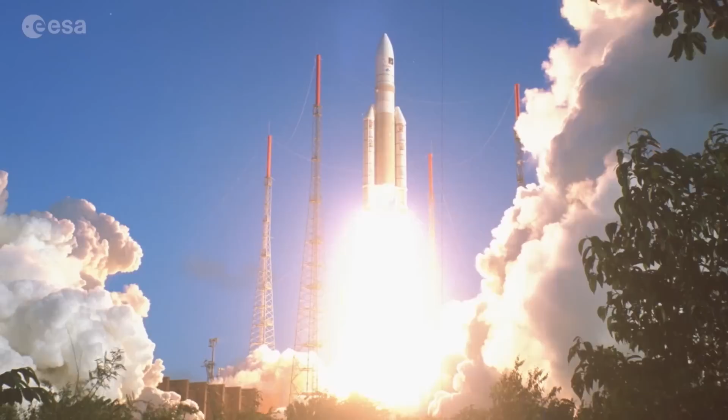This is the largest rocket in regular operation today. The Ariane 5 represents the evolution of a family of launchers that started when Europe's space industry was in its infancy.

This massive launch vehicle is built all over Europe, but assembled here in the cathedral at the Ariane Group construction site at Les Mureaux.

It is a robust design that has resulted in 85 completed launch missions in the last quarter of a century. But in the next 2 years, it is due to be replaced by the more versatile and competitive Ariane 6.

Six, 5, 4, 3, 2, 1, top. Allumage Vulcain, allumage des 2 EAP et décollage VA244.

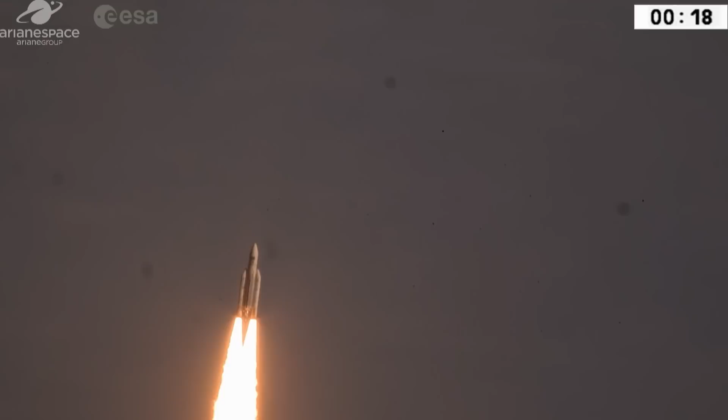The Ariane 5 launcher shoots into space, its rockets not only pushing its own weight in metal and fuel, but also a high-tech payload. The launch is the culmination of decades of development, experimentation and research in engineering and ballistics.

That's why rockets are dangerous, because by nature they are very explosive. The reaction principle, found by Newton in 1687, is that you expel something behind you fast, and the faster you expel it and the heavier what you expel is, the more reaction you get.

The most exciting moment, and the reason we have this profession, is the first time you launch a new launcher, or the first time you launch a launcher on which you've had a key role in the design, or for my case, in rebuilding the flight software of a launcher.

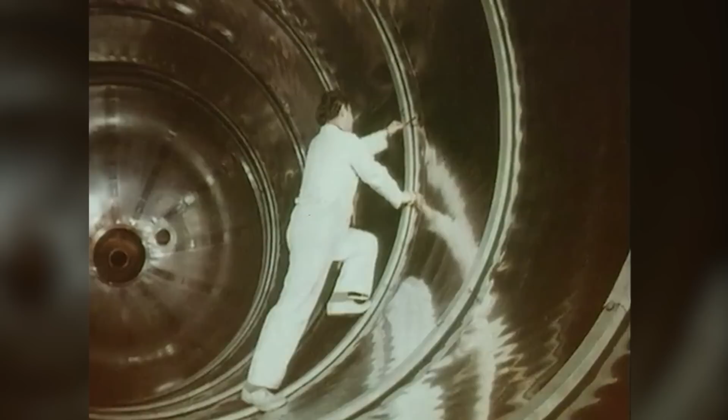The Ariane rockets were developed in France, but draw on almost a century of experimentation and research worldwide. Europe's rocket scientists began with simple, unreliable machines.

One of the founding fathers of modern rocketry, the Russian Konstantin Tsiolkovsky, discovered the propellant power of liquid hydrogen and oxygen.

In 1914, the American Robert Goddard proposed multi-staged rockets, solid fuels, and the use of the Laval nozzle, narrowing at the waist to accelerate the hot gases to supersonic speeds.

In Germany in the 1920s, Hermann Oberth studied rocketry and proposed that rockets could be used to explore interplanetary space. But when the Second World War broke out in 1939, all Germany's rocket science was put to building wonder weapons.

Wernher von Braun led the rocket program based on the Pomeranian shoreline at Peenemünde. It did not change the course of the war, but it opened a new chapter in space exploration when von Braun moved to the United States under Operation Paperclip, while other top German scientists were taken to Russia.

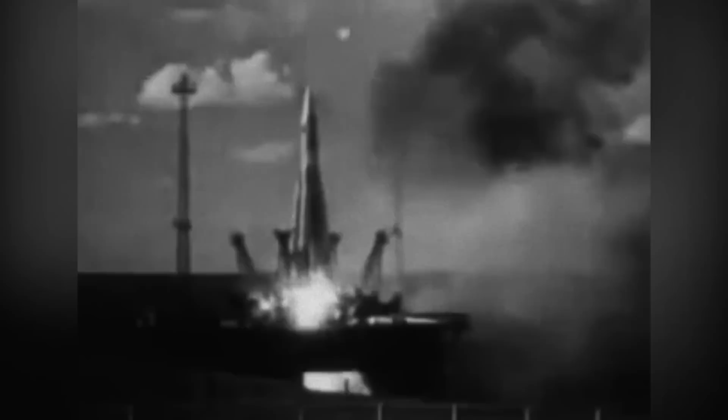Wherever they were made, rockets were at first powered by extremely volatile propellants. One of the world's foremost aerospace journalists is Bernard Chabbert from France.

In a rocket fuel, you have two components: the propellant and the oxidizer. The propellant can be kerosene, just like on the first stage of Apollo, for instance, and the oxidizer is something which helps it burn. Chemically, when you mix a very raw propellant with a violent oxidizer, the more violent it is, the more powerful it becomes.

Engineers have learned from the many mistakes of the last century to produce the reliable, fine-tuned rocket engines of today.

Mechanically speaking, it's a nightmare. You bring them into a combustion chamber where they have to be precisely mixed, more precisely than any cocktail in a bar. It's really pure chemistry.

You're working at the extreme of metal capabilities. You are going to really try to break something and stop just before it breaks. You have to gimbal the thrust, and this is done - it's just like cutting flowers. It's really something very precise, and it's almost a work of art in terms of guidance.

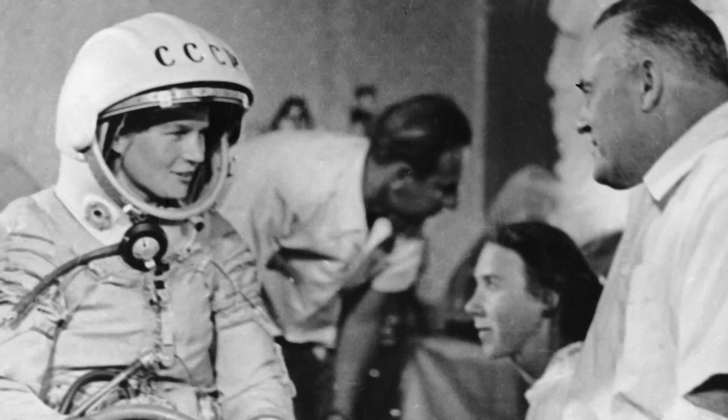Russia's own rocket genius, Sergei Korolev, began the Soviet Union's rocket program, developing first the Sputnik satellite, kicked into orbit by an R-7 rocket, and then the first manned spaceflight. By 1959, Russia had landed a vehicle on the moon, and sent a satellite around it.

Russia was winning the space race, and the United States had to respond. The Russians built a staggering number of R-7, Semyorka rockets.

It's tens of thousands, because they used it for military use as an ICBM, and they used it to launch Gagarin. They launched the Sputnik with it, they launched Laika with it, and today Europeans are launching Semyorkas from Kourou, because that rocket is so dependable, predictable and easy to use that it's still in use today, more than half a century later.

Outside the Soviet Union, only the United States had the ability to launch satellites. European nations came together to attempt to launch their own rocket, but it was a disaster.

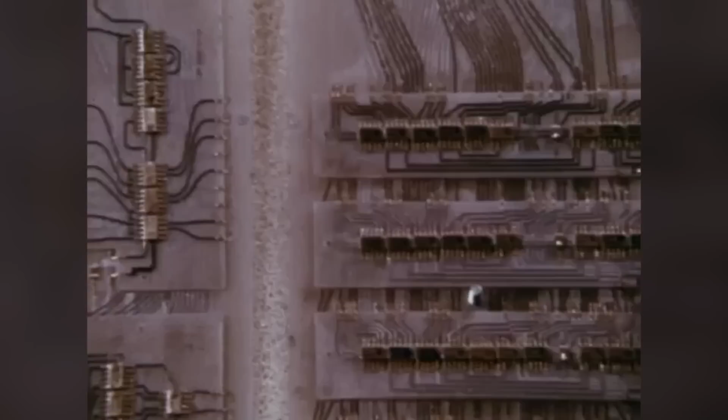The British came with the Blue Streak missile, a strategic missile. The French came with Véronique, a small rocket that evolved into technologically comparable rockets. Everybody brought its own component, they stacked them together, and called it Europa. They brought it to Australia, pushed the button, and it exploded into billions of little pieces.

The French space agency, CNES, Centre National d'Études Spatiales, is located in the heart of Paris, and Christophe Bonal is senior project manager. He has been involved with the Ariane project since the beginning. We developed a brand new satellite together with our German colleagues called Symphonie. This was in 1974, and we had no means to launch Symphonie. So we asked the Americans, could you please help us and launch our satellite? And they said, yes, okay, sure, no problem, you're welcome — with one condition only: please don't make any commerce from this afterward. Just keep it experimental, don't do any commercial activity out of it.

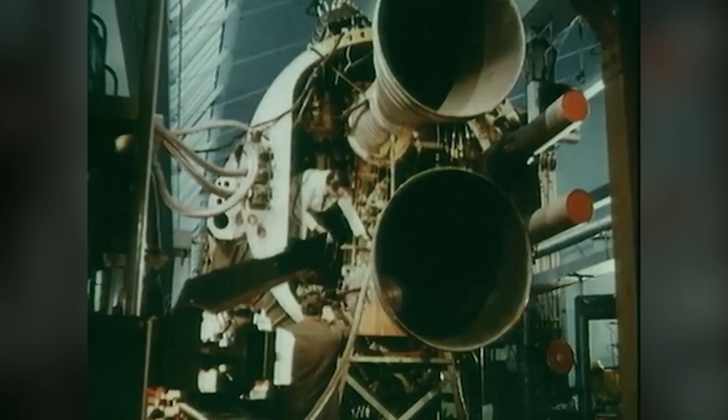And then we thought about it and said, no, whoa, no thank you, we'll do it on our own. So this was the decision for the development of a brand new family of launchers. The Americans, with their position regarding telecom satellites, created in Europe, and more specifically in France, a kind of reaction. Some of the French said we need to be independent in terms of launching capacity. We need to develop our own system, despite the fact that we've just missed the thing with the Europa experience. And that's how they got together.

At the same time, they developed the idea of ESA. The European Space Agency brought together the founding nations to develop an independent space capacity. However, Ariane 1 was still a long way away.

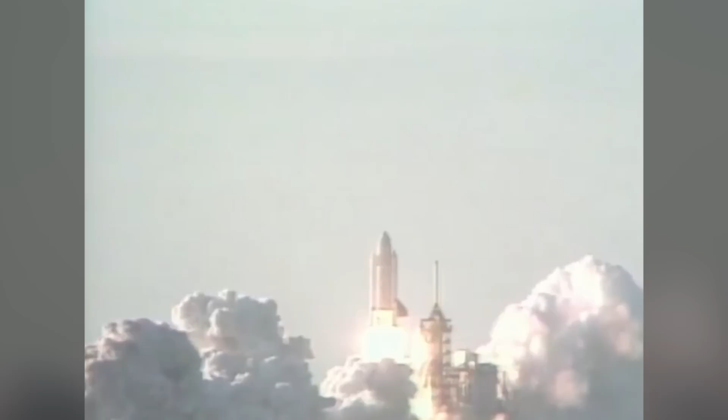In the 1970s, NASA developed the Space Shuttle, a reusable launch system designed to radically bring down the cost of launching satellites. It was an engineering masterpiece. There was this old idea of an aircraft going so fast and so high that it would get into orbit, and it became the shuttle. But I was there in Houston when they were launching the shuttle idea, and we had endless conferences about that, with people saying the shuttle would be a mix between the best of the rocket and the best of the aircraft. The end result was that the shuttle was a fabulous mix between the worst of the rocket and the worst of the aircraft.

When they built the space shuttle, in their opinion it was such a revolutionary machine that it should be able to fly every day, for negligible cost — so cheap, just to use and so on. So they came and told us, stop your Ariane, it's useless, just come and work with us on the space shuttle. And we said, sorry, but we like our autonomy. Okay, our launcher may be conventional, but we think it has some future. It paved the way for the huge success of Ariane that we still have today.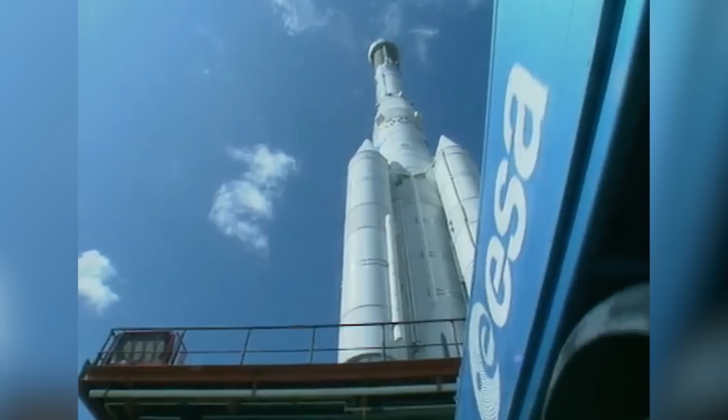The Europeans decided that there was a market. What does the market want? What does the market need? They found out that everybody in the world was waiting for the age of telecommunications to arrive. So they developed the first model of Ariane and evolved it into new systems that were only beefed-up versions of the basic philosophy, up to Ariane 4, which was probably the most extraordinary of them all in terms of delivery and cost per kilo to orbit.

Demand for the ability to launch satellites into space was literally skyrocketing. The Ariane family of launchers evolved throughout the 1980s, together with the telecommunications and observation satellite markets. By 1990, the Ariane 4 was well on its way to being the workhorse of commercial rocketry.

This is the so-called cathedral, where the Ariane launchers are assembled. It is here that the mystery of space flight becomes solid engineering. Hervé Gilibert is the chief technical officer of the company that actually builds the rocket, Ariane Group. He is here to oversee an event that is rarely filmed: a central cryogenic stage being loaded into a container for transport to the launch pad at Kourou in French Guiana.

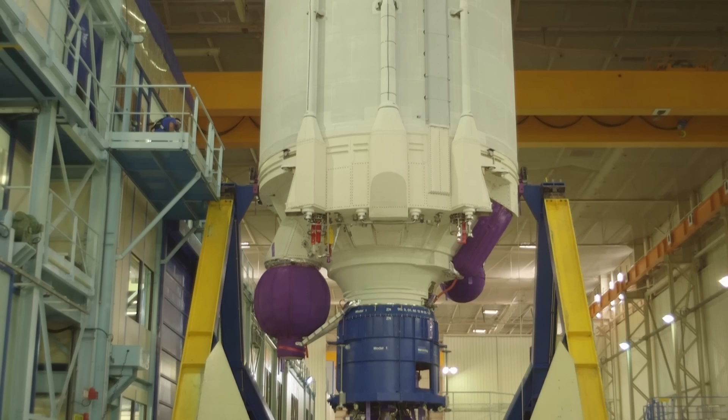We are in our final assembly line in Europe. This is the building named Building 60 in Les Mureaux, where we assemble the main cryogenic stage of our Ariane 5 rocket. This stage you can see behind me. We are very lucky today because we are moving one stage from the building here towards Guyana, so it will be put horizontally in the coming minutes. This stage is shipped from here to Kourou, and there we finalize the assembly with the other stages that will join it and constitute the final launcher.

No less than four cryogenic main stages of the Ariane rocket are under assembly here today, and the industrial work involves riveting and subsequent cleaning of the rocket bodies, followed by the insertion of the engines, piping, fuel tanks, and turbopumps that turn these massive steel cylinders into rockets. It can be a noisy process.

The key parts of the central stage ready for delivery are enveloped by purple covers, and each moving part is blocked by pins that hold them in place. The rocket will not be launched until every single purple element, cover and pin has been removed and visually accounted for. The blue bracket over the engine protects it from inadvertent breakage during transport.

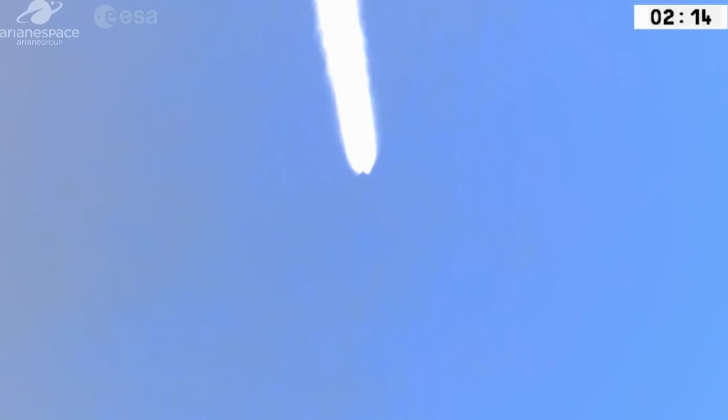The choice of solid fuel gives it maximum power in the shortest space of time. The solid propellant's job is to push the rocket into the high atmosphere. But despite its apparent robustness, the rocket is fragile, and the boosters are programmed to provide just the right amount of thrust at the right time.

In the solid boosters, we use an oxidizer and a fuel mixed together in solid form. For the oxidizer we use ammonium perchlorate, and for the fuel, or reducer, we use aluminum powder, in a very, very tiny powder form. The reaction between the two generates very high temperature and very high pressure, which is used for propulsion.

Engineers have found ways to provide exactly the right power at the right time by modeling how the propellant is inserted into the booster. The very first thing we ask of these boosters is to have a very high thrust, to get out of Kourou as fast as possible. So instead of just a pure cylindrical canal, we use a kind of star shape, artificially increasing the surface that is on fire, which gives us a higher mass flow and so a higher thrust.

The solid propellant in the lateral boosters is extremely fast-burning and volatile. It provides the power to get out of the atmosphere, but also makes up 90% of the rocket's weight. Once the star shape is completely burnt, we have less surface, so the thrust goes down. That's very important, because this is the most critical part of the flight, called maximum dynamic pressure, the moment when aerodynamic stresses on the launcher are greatest.

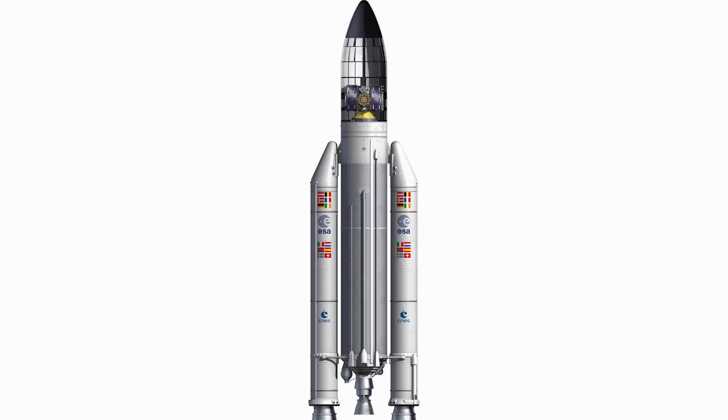The two solid fuel boosters are attached to the main rocket via solid brackets that hold them in place to ensure the power is perfectly controlled. However, the main force applied to the main cryogenic stage is at the shoulders.

One could believe that the two boosters are attached to the main core via the three rods, twice three rods we have in the bottom part of the launcher. In fact, they are not bearing at all the loads generated by the thrust of the two boosters.

What we do is link the main core and the boosters through the head of the boosters. In fact, we push the main core, and the main cryogenic stage that you can see behind me is not designed to sustain the very high loads that would come from the boosters through the rear part. It is simply hanging between the two boosters. This is our little secret, let's say.

All the thrust goes through here. We have a kind of joint, a spherical joint, where all the thrust is passed. So we have a cup and a sphere, and this takes out all the thrust in all three directions.

But then, how do we prevent this kind of movement? For this, we have three struts at the bottom of the launcher which prevent the lateral movement like this. So all the thrust goes through the front joint, and the lateral movement is stopped by the three struts that we have at the bottom of the stage.

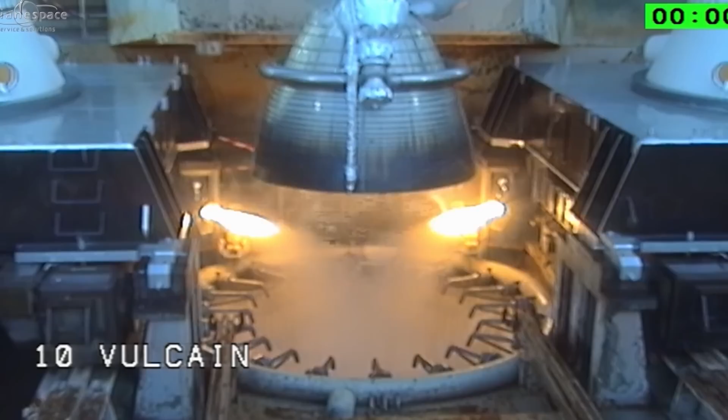The main body of the Ariane is made up of a huge cryogenic engine. The Ariane 5's engine is called the Vulcain, Vulcan, the god of fire, in French. Although the principle is very simple, the actual workings of the rocket engine are extremely complex.

The cryogenic engine used on the Ariane rocket is a formidable tool for getting satellites into space. Its workings are amazingly complex. The cryogenic engine is a fantastic machine.

This starts with a small gas generator which takes liquid oxygen and liquid hydrogen from the tanks on the launcher in order to generate a flame, gases which are exhausted at very high speed, to put in rotation two turbines, the liquid oxygen turbopump and the liquid hydrogen turbopump. These two turbopumps are also fed with liquid hydrogen and liquid oxygen, and they push that amount of fluid into a thrust chamber, into an injection plate, which is the entry of the thrust chamber.

We are pumping hydrogen, so the liquid hydrogen has some specificities. First of all, it's so lightweight, 14 times less dense than water, so you have the impression of pumping air. For this you need very, very high performance turbopumps going very fast in order to pump as much as possible. For instance, the turbopump of the Vulcain engine on the hydrogen side is the size of a microwave oven, and it has the same energy as two TGV trains, two fast trains, so it's very, very impressive.

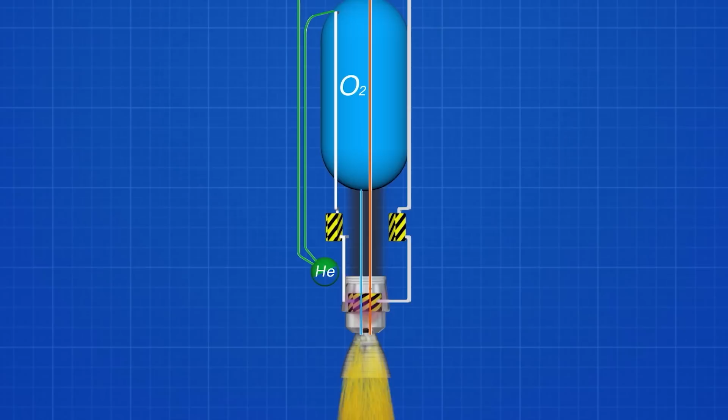In order to store them in liquid form, they need to be frozen to below -200 degrees centigrade. The two liquid gases, however, will not mix by themselves. They need to be pushed together through pipes and injected into the combustion chamber at exactly the right speed. This is the job of the turbopumps. However, these are actioned using some of the energy produced by the combustion. So to get them working, liquid helium is pumped from these spherical tanks into the main fuel tanks to push the oxygen and hydrogen through the turbopumps into the combustion chamber to ignite. Calibrating the pressures is extremely complex.

Bringing all the pieces together to build an Ariane 5 is a remarkably complex operation. The main stage is completed here in Les Mureaux, but the Vulcain engine is built in Vernon in Normandy, while the boosters are made in Bordeaux, and the third stage in Bremen, Germany. The turbopumps for the engines are made in Italy. Bringing all this material together and making sure they all fit is a complex operation and requires months of checks

and tests. Parts are coming from Germany, MT Aerospace in Augsburg for the upper skirt. Parts are coming from Les Mureaux here. The company just beside me here is delivering the tanks together. Then below the tank we have a thrust frame which is coming from Netherlands, and then the engine, the Vulcain 2 engine, coming from Vernon in France. Most of the time we take in this final assembly line is with checks of tightness, checks of electric continuity, electric isolation, and so on.

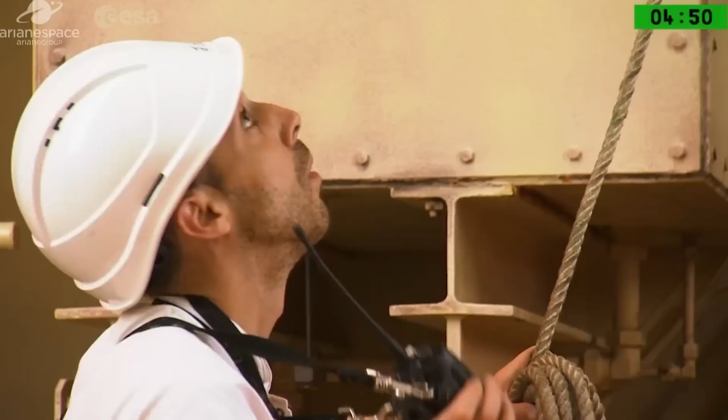Here, vital activities complete the production process of the Ariane 5 rocket. This is where the boosters are filled with solid fuel, and where the liquid gases, hydrogen, oxygen, and helium, are loaded into the tanks. The ground infrastructures are massive, and the launch pad is designed to survive the huge thrust provided by the rockets and the cryogenic engines. This is where the weather is monitored, the winds especially, that can cause a mission to be delayed or even aborted. This is where the control room follows every second of pre-flight activity, and where the computers that control the flight are located. It is a massive infrastructure owned and run by the French space agency CNES.

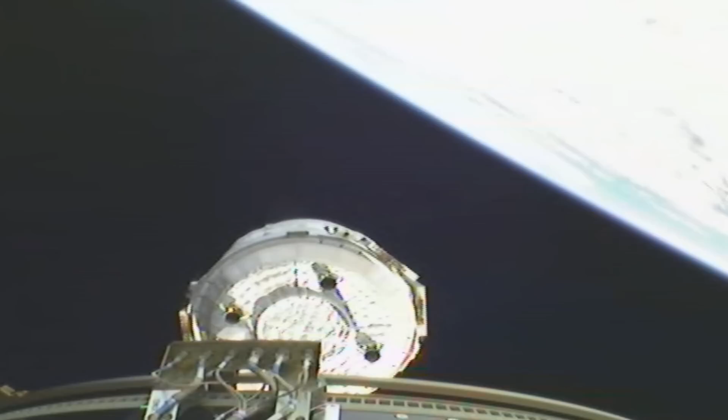This is the most delicate phase of the mission - it's the moment when the value of an object launched into space comes into its own. The make or break moment of the launch comes when the final stage pushes the payload into its final orbit. The last stage, which holds the payload fairing, is powered by a highly flammable and toxic fuel called MMH hydrazine.

Where we very often aim is what we call low Earth orbit, roughly up to 2,000 kilometers altitude. This is very used for all the observation missions - it's one of the key markets, low Earth orbit for observation, environment, meteorology, and so on. Then if we move on, we have roughly 20,000 kilometers from Earth, where we have the GPS satellites, Galileo, and their equivalent.

The most useful orbit is GEO, Geostationary Earth Orbit. Geostationary means it's an orbit where a satellite, when placed there, is always seen as fixed from any observer on the ground. That's two-thirds of the commercial market today.

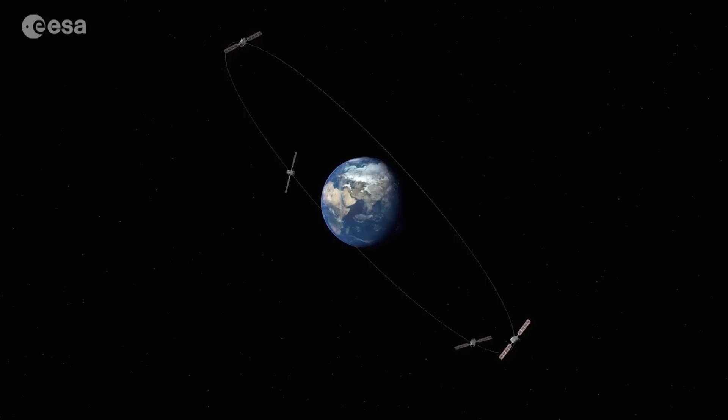Apart from launching thermonuclear weapons, the only goal of rocket building is to launch satellites and modules for the International Space Station. Communications satellites may cost millions to make, but over a service life of decades, and with the spread of radio telephony, they will pay for themselves many times over. In proportion, the cost of launching is minimal, and that cost is further reduced by economies of scale.

Ariane Group's future depends on the evolution of the satellite industry.

While Ariane 5 was initially developed by the European Space Agency under the technical leadership of the French space agency, CNES, the next European rocket is being developed directly by the constructor, Ariane Group. There was a decision made by the European member states, the European governments, 4 years ago, by which we decided to group under one single umbrella, one single industrialist, the role of lead system integrator in production - meaning the architect of the launcher during development and design, and the engine manufacturers. So teams from Airbus for the first part and from Safran Group were put together in one single company, which is our company now, Ariane Group, and the decision was made that this company should be the prime contractor and the architect of the launcher.

Competition in the marketplace has picked up with the arrival of private constructors. The first launch of the Falcon Heavy in February 2018 seemed to be a turning point in Elon Musk's ability to deliver heavy satellites into space.

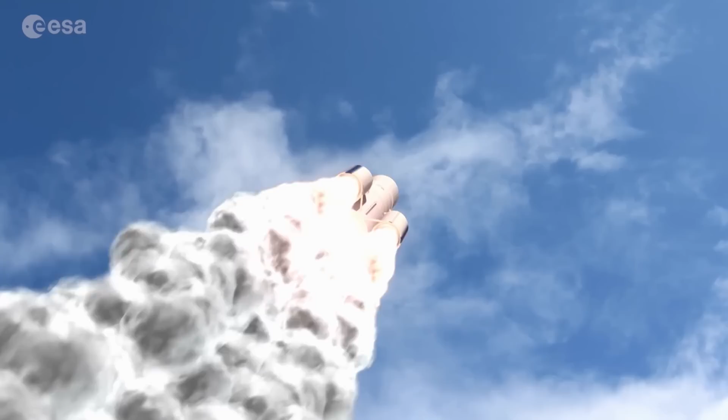Ariane Group has chosen a different path for the time being. We have changed some little but big things on Ariane 6 with respect to Ariane 5. The boosters are smaller on Ariane 6 than on Ariane 5 - this is a matter of 147 tons of propellant per booster on Ariane 6, so 2 big boosters for Ariane 5 and 2 or 4 smaller boosters for Ariane 6, which gives modularity and the opportunity to launch small payloads at low Earth orbits, or bigger payloads, even slightly bigger than Ariane 5 today, when we have 4 boosters for high altitude orbits. Being able to modulate the weight and power of the launcher means Ariane 6 will offer a more flexible launch service.

Many smaller satellites or fewer large satellites, 2 lateral boosters or 4. And above all, the final stage can be reignited to position satellites in different orbits.

The cryogenic engine will be improved, although the basic structure will remain the same. Construction of the rocket will be more streamlined too, and the thousands of rivets holding together the cylindrical segments of the rocket will be replaced by a new form of welding.

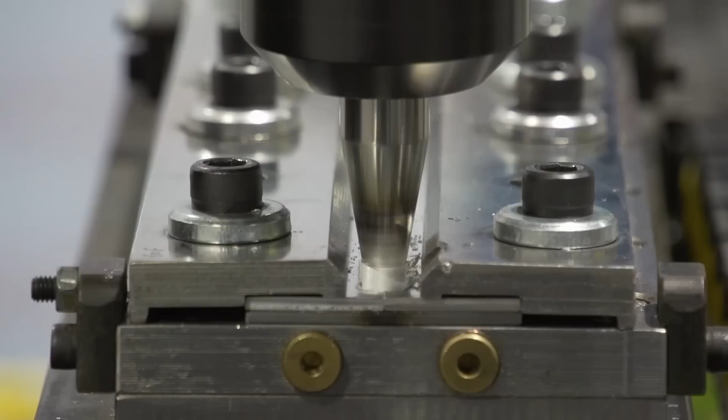Another example is the way we weld the panels that constitute the tanks. We had quite an old technique used on Ariane 5, because Ariane 5 was designed in the 90s, even a little before. So all the welding techniques are now replaced by a safer, more secure one, called friction stir welding, which works by melting the two parts you want to join. You melt the interface between them, and they naturally stick to each other without any defect or discontinuity in the material. Friction stir welding uses friction to melt two surfaces, and as they melt, they are pushed together to form a single surface. It's another new manufacturing technique that increases robustness and lowers cost.

What we are preparing on Ariane 6 is new ways of manufacturing. Additive manufacturing really pays off for propulsion parts, parts of turbopumps, and gas generators on board the engines, building these parts via additive manufacturing, which is 3D printing. By doing that, we save a lot of time - months in the production of these parts - and a lot of energy and power supply. So there are lots of savings here, but we keep the same material as before. We just manufacture the part in a totally different manner.

The Les Mureaux plant has been redesigned, with an entirely new factory built alongside the cathedral. The Ariane 6 will be built horizontally, allowing easier access for workers.

Europe deploys its own navigation system, Galileo, using the old Ariane 5 workhorse that has paved the way for European access to the growing space economy. As the rocket, with Galileo aboard, hurtles into space, powered by its two lateral boosters and the cryogenic Vulcain engine, its mission is to complete the European-owned and managed navigation and observation system.